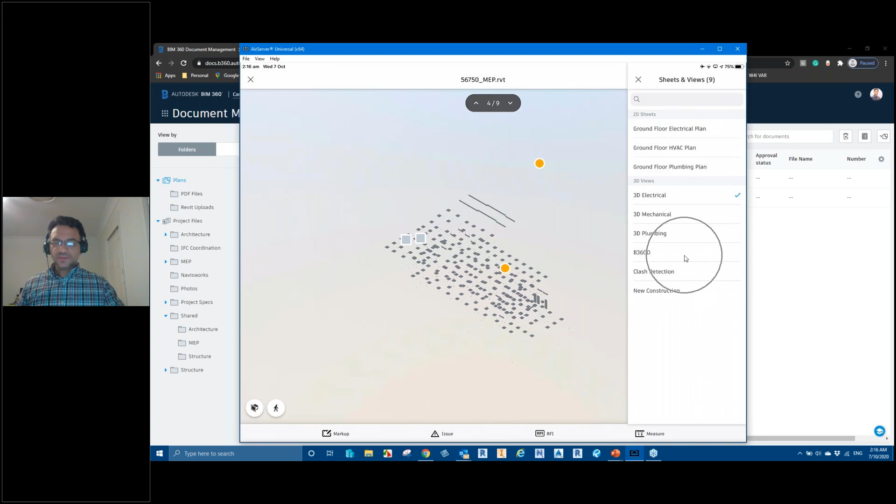It now gives me access to all the sheets that were published, as well as the views. For example, if I click on this B360D view, as soon as I tap on it, it opens this 3D view in a few seconds. This 3D view now gives me access to the full federated MEP model, along with the linked structure model.

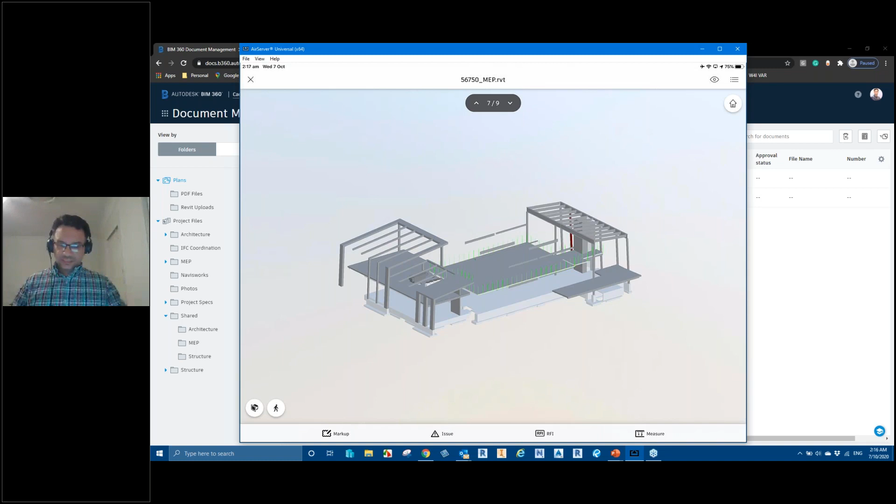In this view, I've not only got the mechanical, electrical, plumbing model, I've also got the linked structure model in here as well, just in case I'm on site doing some installation and making sure that things are working fine. Similarly, if I tap on the menu button on the top right again, if I go on the sheets and views...

I've got my 3D mechanical view, I've got my 3D plumbing view. I also have got a clash detection view here. This clash detection view was published to make sure that when you're running clashes, you're not including flexible ducts and things like that in clashes.

So in my case, let's say I'm a mechanical installer and I've gone on site to do some mechanical work. I can now tap on this 3D mechanical view. It now opens a view which only shows the mechanical discipline in it. It doesn't show the rest of the disciplines.

If I tap on this little eye icon on the top right, it shows me that there are issues and RFIs in this view. I can tap on any of these to turn them off. So this is how you can switch between different views and different sheets in this iPad app.

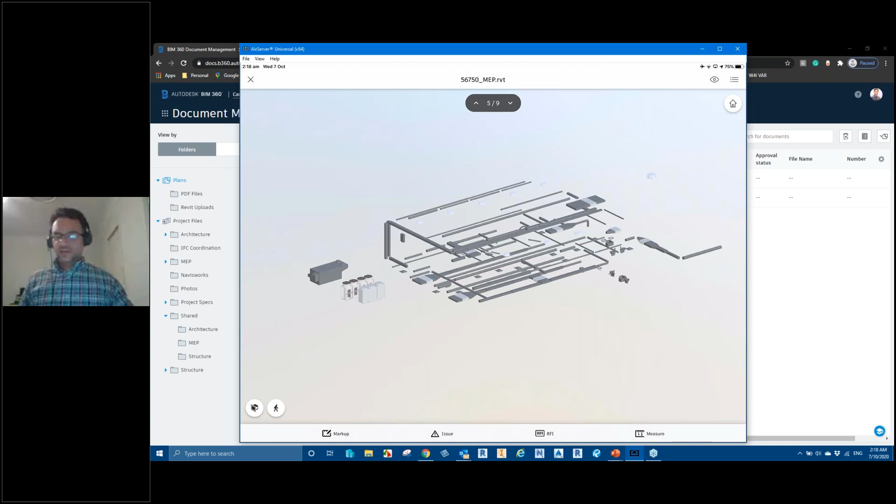Again, if I tap on the menu on the top right, I can also look at issues and RFIs and things like that right from here. But if I just quickly cross out of it and go back to the original page, this is my home page on my BIM 360 mobile app.

If you look at the bottom toolbar, I've got some options here, such as documents, issues, checklist, sync, daily logs, and RFIs. As I mentioned earlier, documents and issues are part of your basic BIM 360 document management service. So if you've got BIM 360 Docs or BIM 360 Design, you've got access to all of these. RFIs, daily logs, and checklist are all part of the BIM 360 Build subscription.

So RFI would be available if you have activated the project management service on your project, which is what I've done. I showed you earlier as well. Because I've got project management service active on this project, I can see RFIs.

When you are on site, you normally would start your day on this page here, and then depending on what you're trying to do, if you're on site to resolve some issues, you would simply tap on issues on the bottom toolbar, and it'll show you all the issues that you've got open. Depending on how and where the issue was created, it would also tell you the location of the issues and so on.

Similarly, if you are on site to do some installation and you want to access the documentation, you would simply tap on the documents option on the bottom toolbar. So if I tap on documents, here we go. As I said, if I go to the plans area, I've got access to the PDF files. If I tap on any of these PDF files, I can see all these PDF files here. Similarly, if I go back to the project files area, I've got the shared folder.

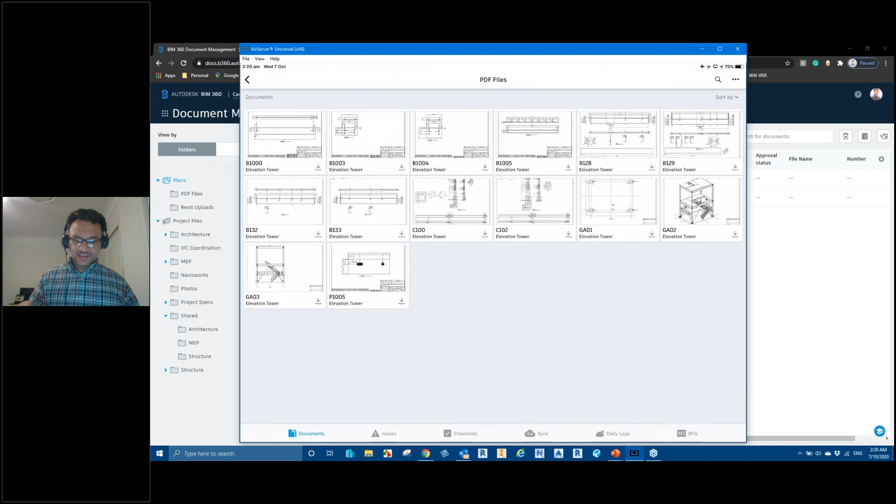So now that we understand the interface a bit, let's say in my case I'm on site doing some installation — let's say structural installation. If I go to the plans area and the PDF files, I've got all these different fabrication and installation documents here. So if I tap on any of these PDF files, note that I'm now in PDF files, and it opens the PDF file here.

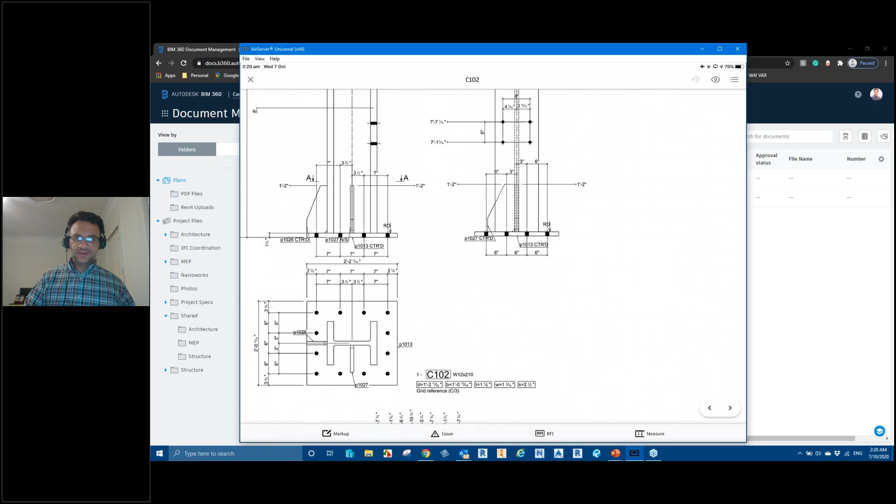Just like any other program, I can zoom in, zoom out, and look at the PDF file. To zoom in or zoom out, you simply pinch. If I pinch my fingers, it zooms out. If I spread the fingers, it zooms in. If I simply hold or tap one finger down and drag, that's panning.

So let's say I'm looking at this document here and there's some problem. Now I've got two options to work with that problem: I can either tap on markups and add markups, or I can tap on issues and add issues. Personally, I'm a big fan of issues because issues have got a proper issue management system running in the background, which means that when I create an issue, I can assign it to someone.

As soon as I assign the issue to someone, they get a notification straight away through an email that there's an issue for them to look at. They can then look at that issue, action the issue, change the status, and things like that.

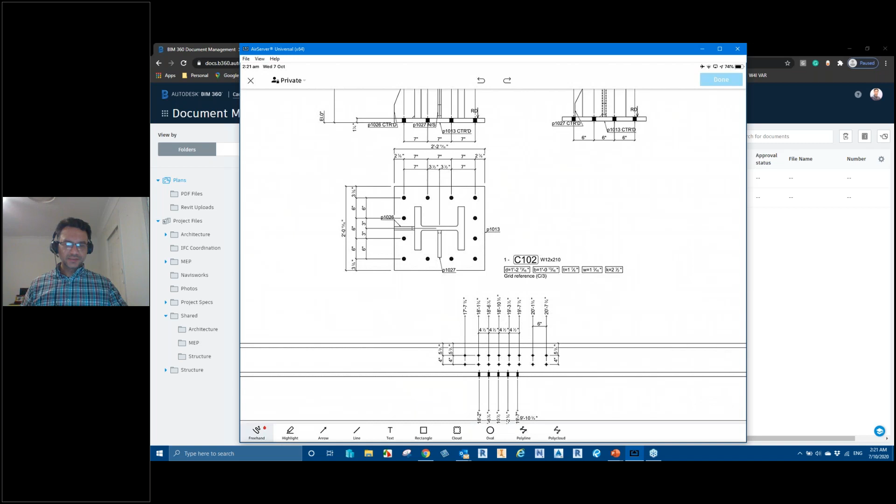But let me quickly start with markup first. So if I tap on markup on the bottom toolbar, now I'm in the markup environment. Now this is a PDF file, so when I'm in the markup environment, I can zoom in and out.

But please note that when you're working with 3D models, which I'll show you in a sec, in the markup environment you can't really zoom in and out of that view. You'll have to actually navigate to the location before you start adding markups.

Also on the top left here, I can see that currently this is going to be a private markup. If I tap on it, I can make it as a published markup. But I want to start with private markup.

I've got this freehand tool available by default. I can tap on any other tool, so let's, in my case, I'm going to tap on the cloud tool. And now I've got cloud tool active.

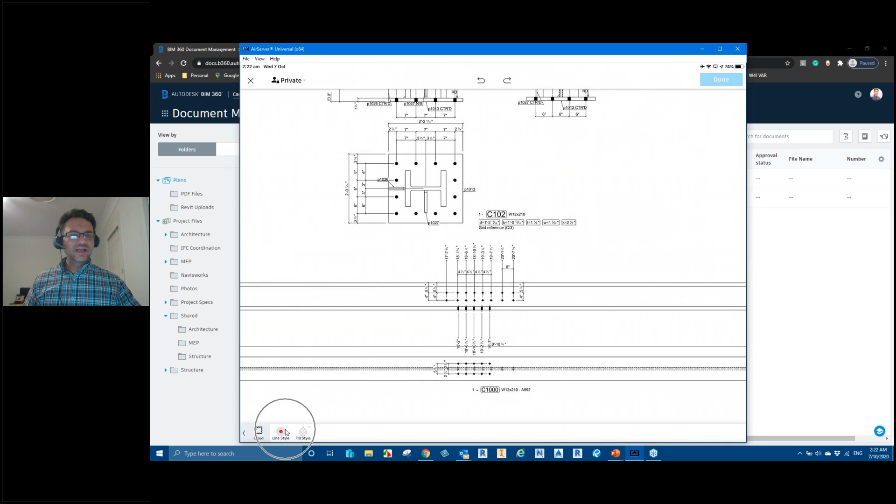I've got line style that I can change from here and fill style. So if I tap on line style, I can reduce the line thickness by tapping on the option here. I'm going to change it to blue color. And now I can drag two opposite corners to create a cloud.

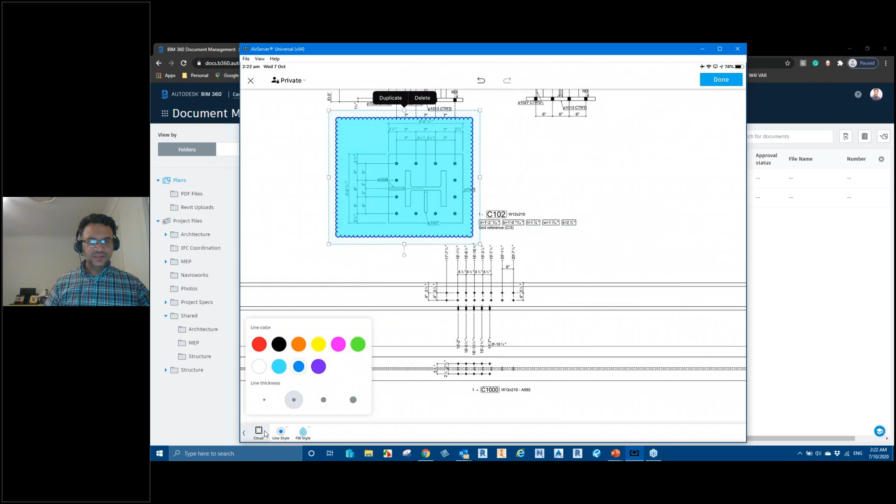I can also tap on fill style and I can fill this cloud with a color. Similarly, let's increase the line thickness to this. Yep, that's good. And now if I tap on this arrow to go back, I can now go and add a text.

So if I tap here and then tap on default text, I can now modify this text here. Let's say weld details missing, so we can get them to add weld details.

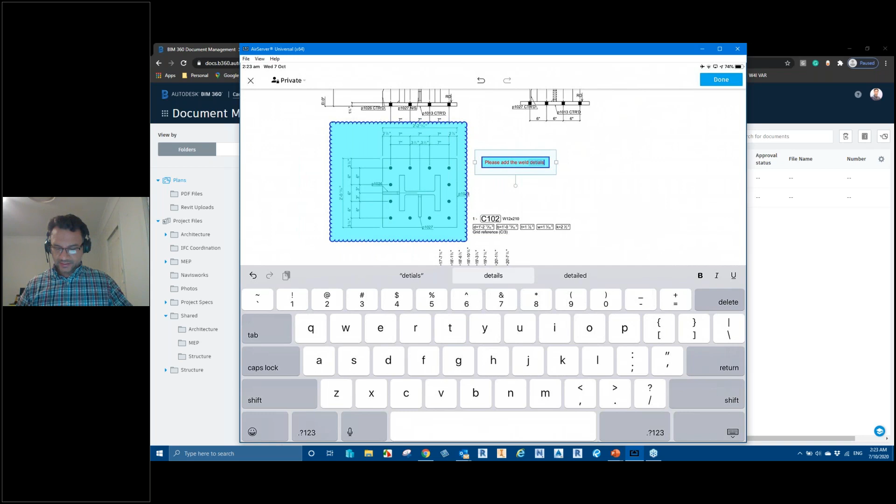And then if I want, I can also go and add an arrow or whatever it is. So let's say an arrow from here to here somewhere. As you could see, when I was adding this markup and this arrow, it remembered that I changed my color to blue, so it remembers those settings.

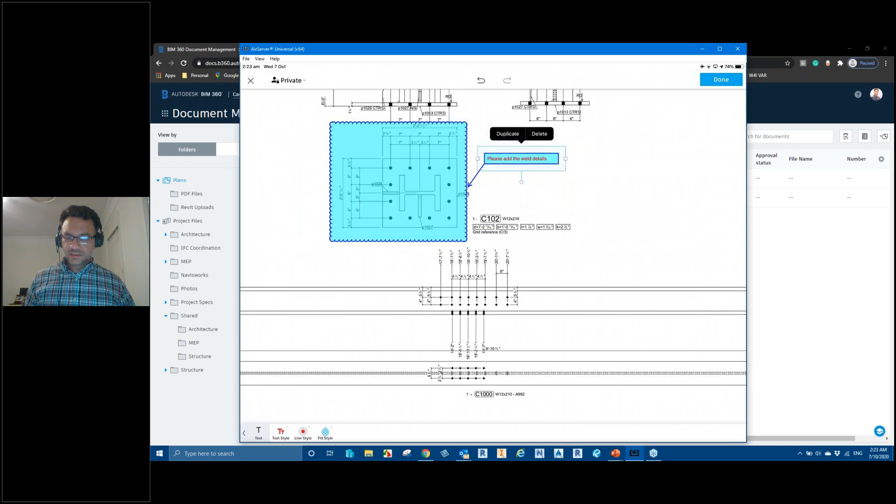Now, once I'm done adding the markup, I can tap done. As soon as I tap done in this PDF environment, I can see this markup here. Now, if I tap on the menu button on the top right again, it's telling me that I've got one markup here. If I tap on markup, it's telling me that that's the markup created by this user today. As you could see, it's telling me it's a private markup.

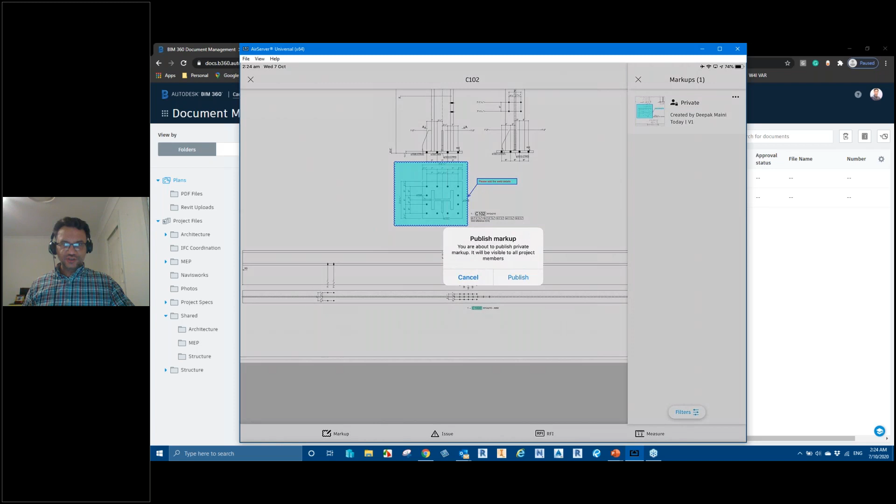At any point of time, I can tap on this and I can say publish. So right now, only I can see this markup. Nobody else can see this markup. But as soon as I tap on publish, that's when it says, are you sure you want to publish the markup? I'll say, yep, no worries. As soon as I say yes, publish markup, that's when all the members of my team who've got access to the PDF files in the plans area will be able to see these markups.

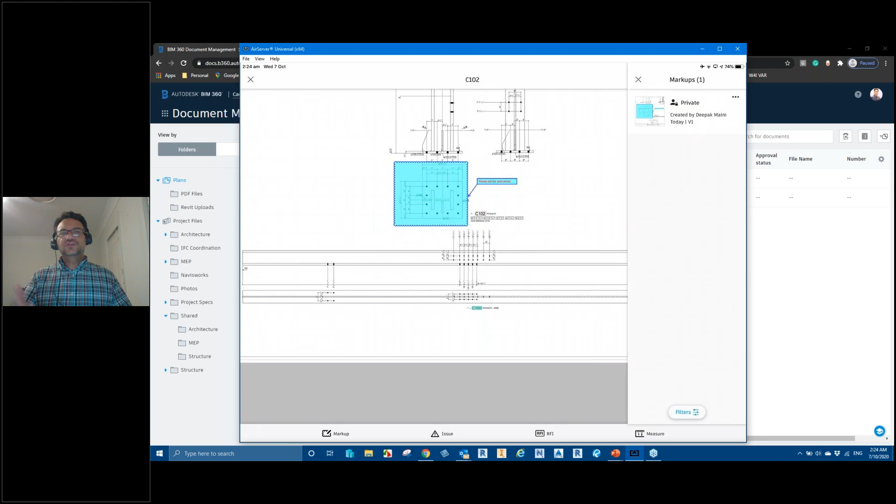However, I have not notified anybody about this. I have not told anyone that there's a problem for somebody to look at. It's like a markup—if somebody goes into this, yep, there's a markup there. So that's why I'm a fan of using issues and not markups that much.

So let's now have a look at creating issues. Let's say I'm the mechanical installer. I go on site and I have some installation issue. So if I go into my shared folder, I could go into the MEP folder here.

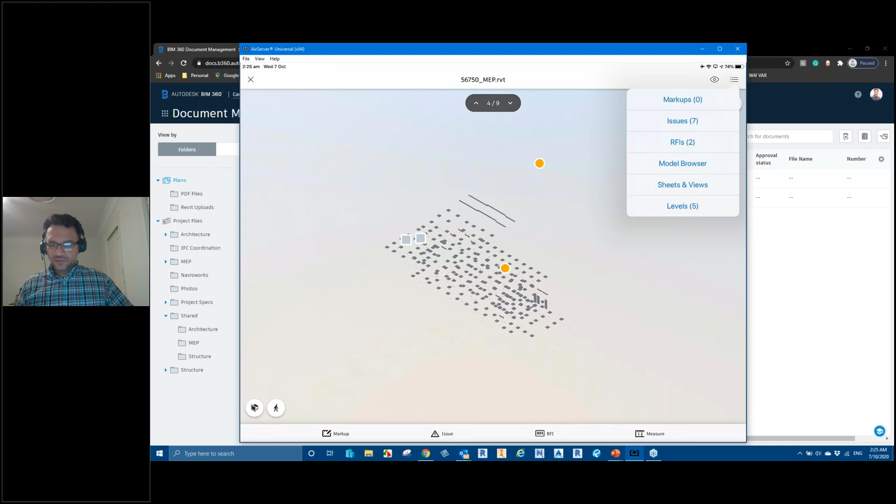I'll tap on MEP, I'll tap on this model. And just like what I showed you earlier, I'll tap on the menu on the top right, and I'm going to go into Sheets and Views. And I'll tap on 3D Mechanical. As soon as I do that, it now shows me the 3D Mechanical view.

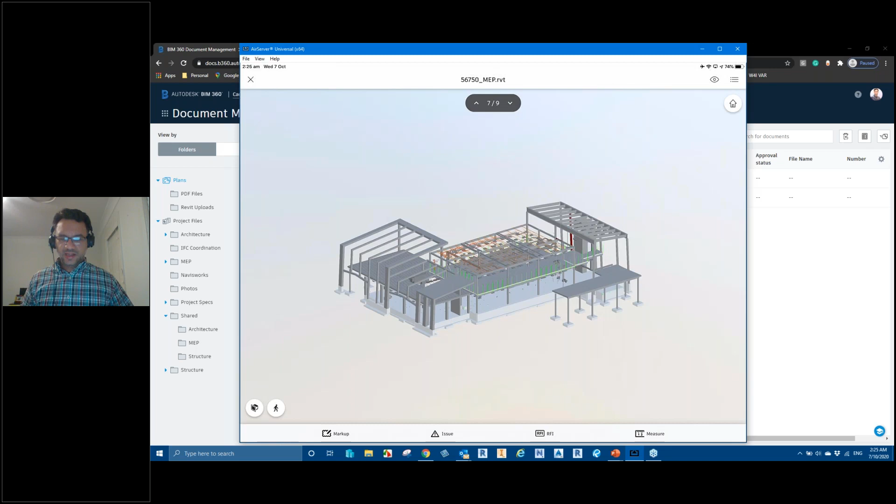Alternatively, I could just tap on this and I can go and say Sheets and Views. And if I tap on B360D, which is BIM 360 Design View, which I showed you earlier is a federated view, in this I've got the mechanical, electrical, plumbing disciplines, but I also have a structure discipline in there.

So let's say I find that there's a problem somewhere here for somebody to fix. I can simply go into that location, and now I can go and create an issue. If I go and add a markup, for example if I tap on markup option, in this case I'm in the markup environment now, but if I try to zoom in or out, I can't do anything. That's because in the 3D views, as I mentioned earlier, once you are in the markup environment, you can't navigate in that view.

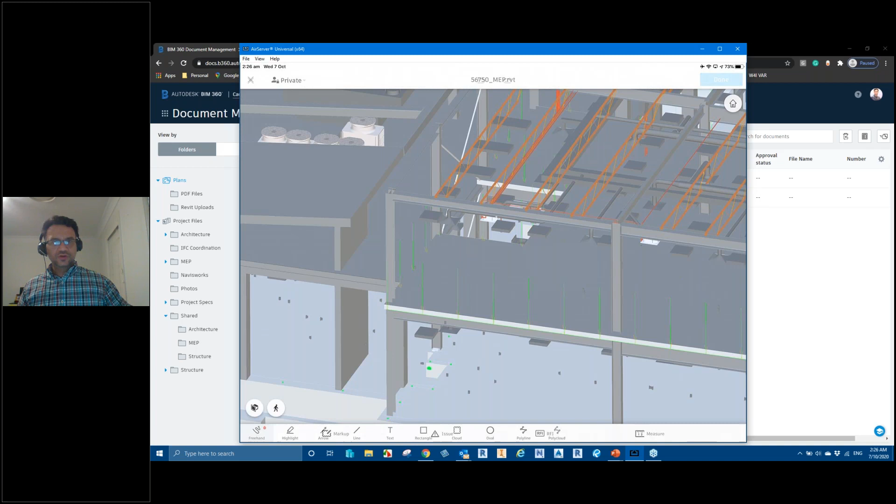So if you really want to navigate in the view, you'll have to exit out of the markup environment, go to the view where the problem is first, and then activate the markup environment. So if I tap on markup now, I can now go and add markups.

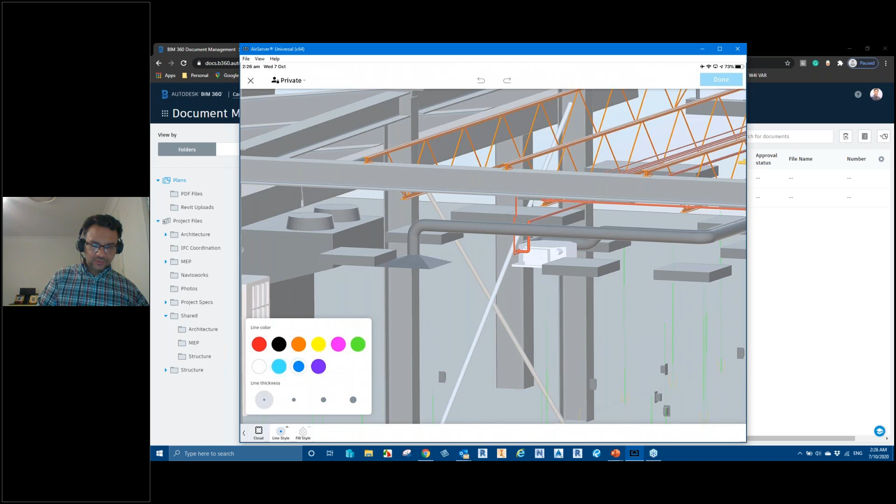Similar to the last time, if I go and say cloud, I'm going to use blue color for the cloud. Let's use this line weight, and I'm going to drag two corner points here, and I can also use the fill color. Pretty much the same concept that I showed you in the PDF file.

Now in the 3D environment, I have to tap on done. Once I tap on done, that's when I can see this markup. And now I can tap.

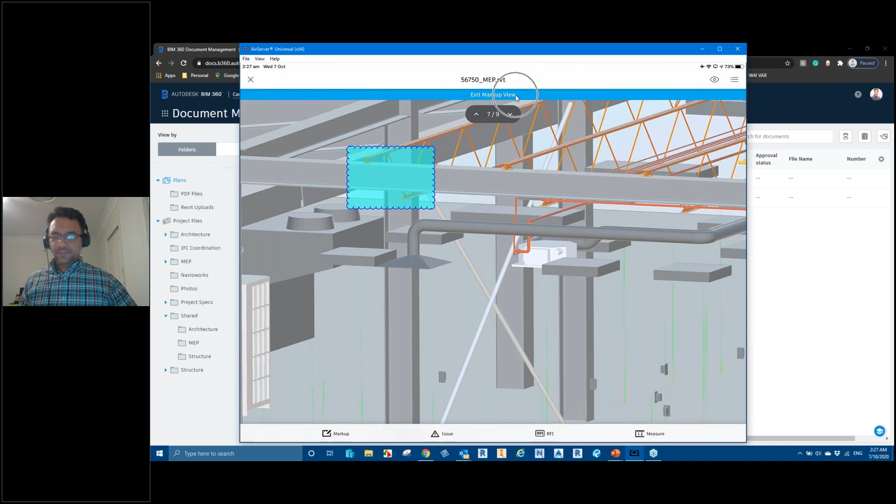So what I need to do is, although I am no more in that markup view within the markup environment, I'm still in the markup view. So I'll have to tap on this exit markup view to be able to go back. And to view that markup, I'll tap on the menu on the top right again, and I can say markups, and that's how I access the markup.

But as I mentioned, I'm not a big fan of that. I rather prefer creating issues. So if I go into this environment here, and there's a problem with, let's say, one of these vents, I can now tap on the issue option on the bottom toolbar.

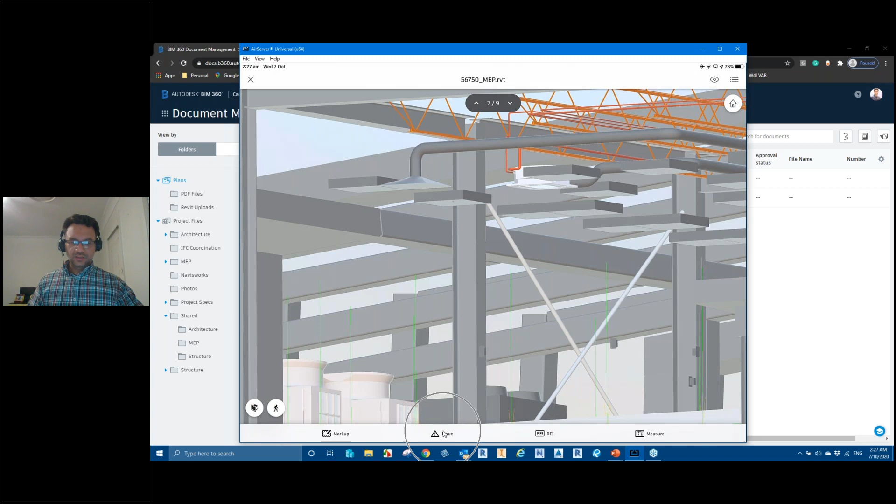Now, the first thing it'll do is it'll ask me to place the new issue pin. So I'll tap on this element here. As soon as I do that, it now places a pin there and takes me to this issue creation environment.

The type is set to design. If I tap on this design option here, I can say, no, that's not actually a design issue. It's a clash issue. It's clashing with something. I can tap on some details here.

So this element clashing with the steel. If I could spell it right, obviously, I could add some description here.

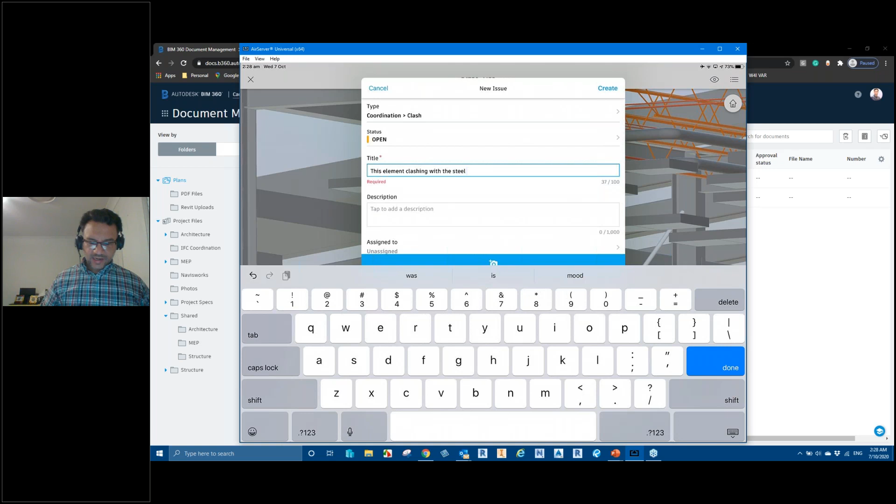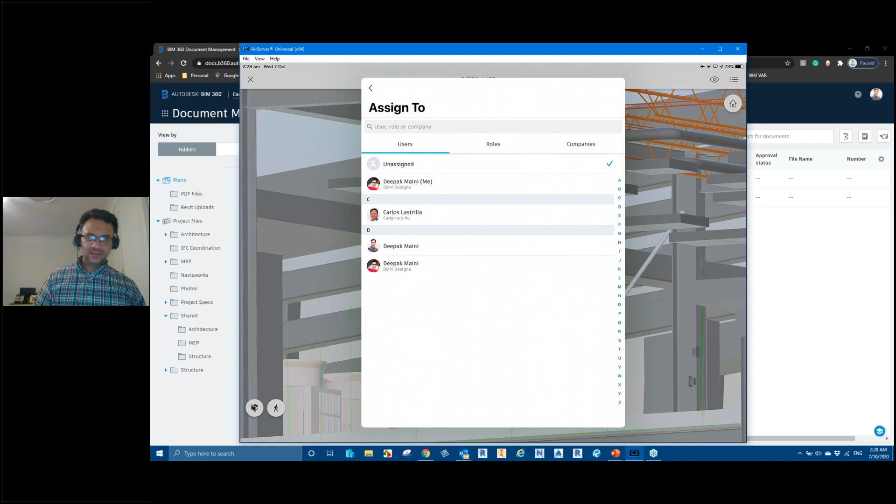But most importantly, I can now tap on assign to. So if I tap on assign to, it shows me the list of all the available members I could assign to. Obviously, I can assign it to myself. In my case, I'm going to assign it to Carlos. Carlos is based in Perth, so it's about 11:30 at night his time. So I'm going to tap on him and wake him up to action the issue.

Now I can also tap on location, and I can say this is in Tower 1 or Tower 2, so that's Tower 1. Please note that the location was visible because I've added location into this project. For due date, I'll tap on this and say, Carlos, you need to fix it by Saturday, and owner is me.

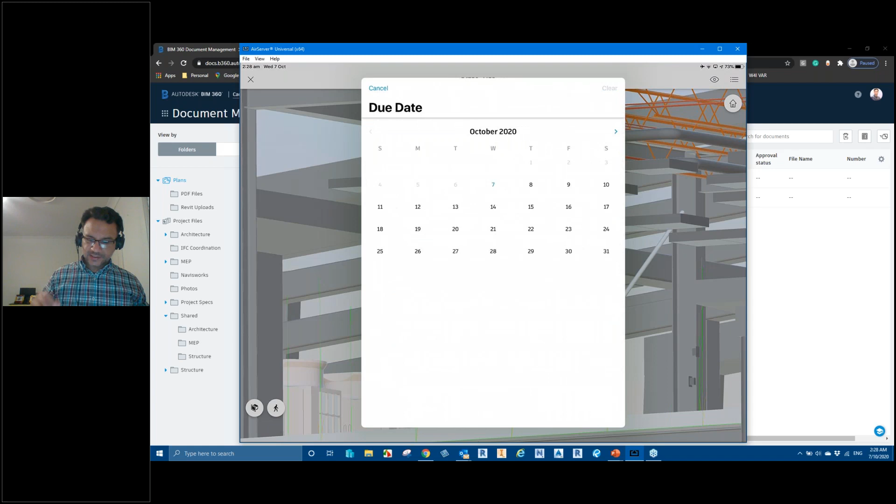Now, root cause, this is one of my favorite features. I would strongly recommend adding root causes to the issues, because as a project admin, I could start my day on my project homepage, which I'll soon show you.

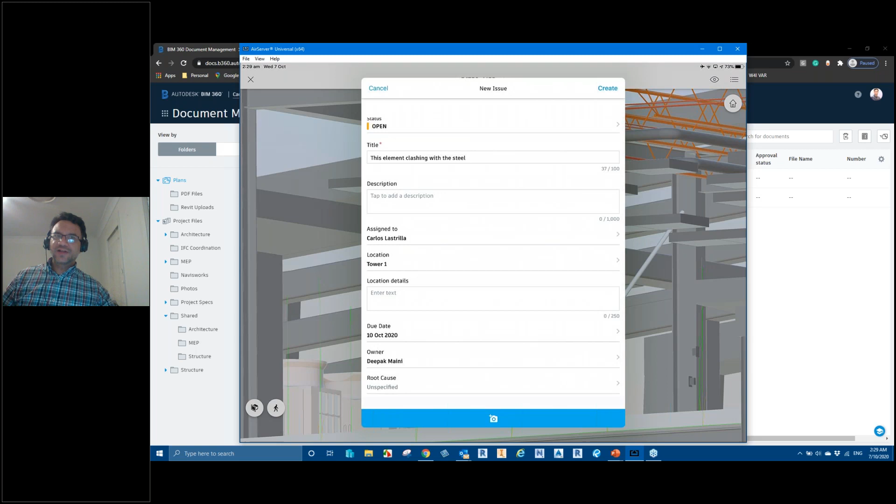And one of the cards that I could have on my dashboard is issues by root causes. So it gives me a single page, like a one-stop shop, to look at all the issues by root cause, so I can figure out what the problem is. Is it the coordination issues, or the clash issues, or some training issues, or whatever?

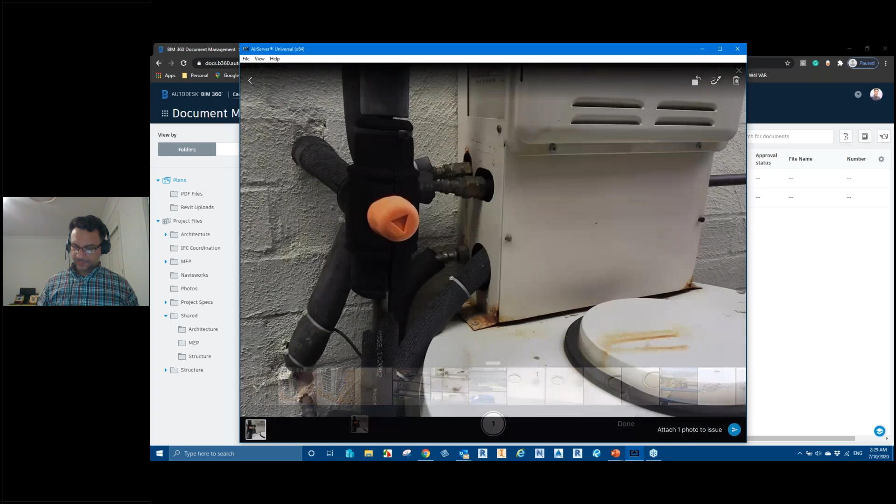So if I tap on root cause here, I could say this is a design coordination root cause. And if I want, I can also tap on this camera button and take a photograph. If I already have some photographs taken, I could just click on them and use that. So I'm going to say done, attached to the issue. With this, I'll tap on create.

So as soon as I tap on create, the user who was assigned this issue is straight away notified. If I tap on this issue here again, I can see the details of this issue, and I can see the attached photograph here as well.

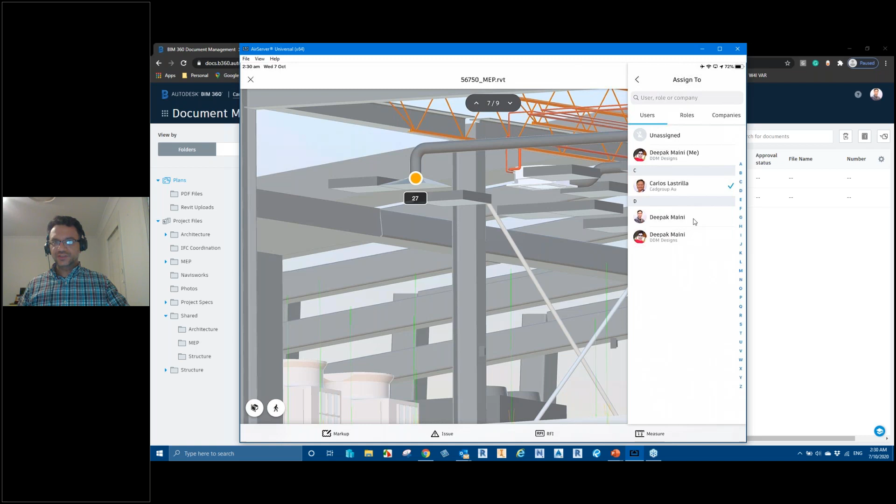So just for this discussion here, I'm going to change the assign to this user here, who's actually logged in as an admin on Chrome. So I'm going to assign it to this user here. As soon as I reassign this issue to this user, they now get an email about this issue.

So imagine if this user was sitting in the office, normally I would start my day on my BIM360 homepage.

If I do a quick refresh now, because I've added an issue, I would start my day on this BIM360 Insight homepage, which is like a one-stop shop to look at different issues in my project, different submittals, RFIs, and so on. One of the cards that I've added is issues by root causes. If I look at this card here, I can straight away see that there are all these different issues.

There are design coordination issues, code compliance issues, and so on. There are also 7 undefined issues, which should not be the case. You should always have issues assigned. And that's the email. Look at this. This user got an email straight away that there's an action, an issue that they need to action.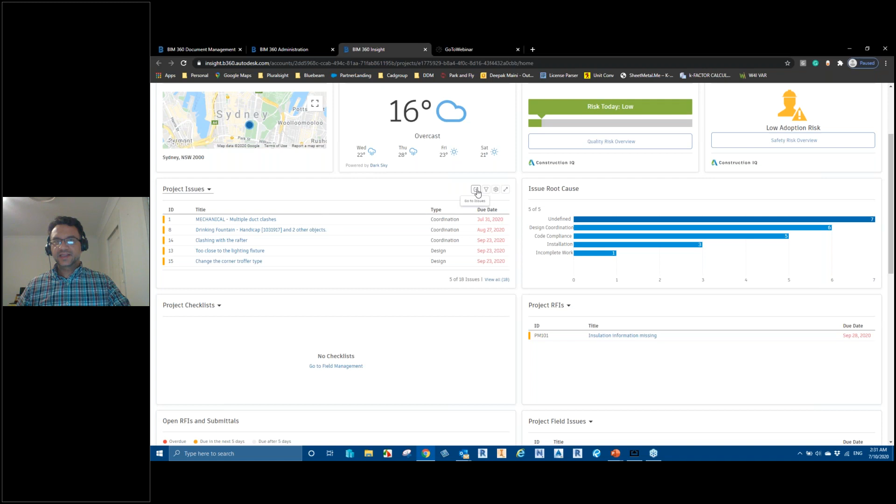So this user can now go into the project issues card here. They can look at the details, or if this user is in the document management window, they could simply go to the issues area and see all the issues assigned to this user. In my case, this is the issue that I just assigned to this user, and the due date is this here.

This is the really cool feature of the issue management system, where as soon as you assign an issue to a user, they get notification straight away, as you just saw in an email. They can now click on this issue and start actioning this. Once they have actioned the issue, they can then change the status of this issue.

So in this case, if I go and say status to answered, I could add an official answer: this is resolved in the next model, please review the model. And as soon as I go and say done, this is the best part of that shared folder.

So this issue was raised, there's a problem, and the design team gets together and says, yep, there's a problem, so we're gonna move this down or whatever it is. And then as soon as they make changes in the design files and they issue or publish or share their package, the user on site now has got all the latest documentation.

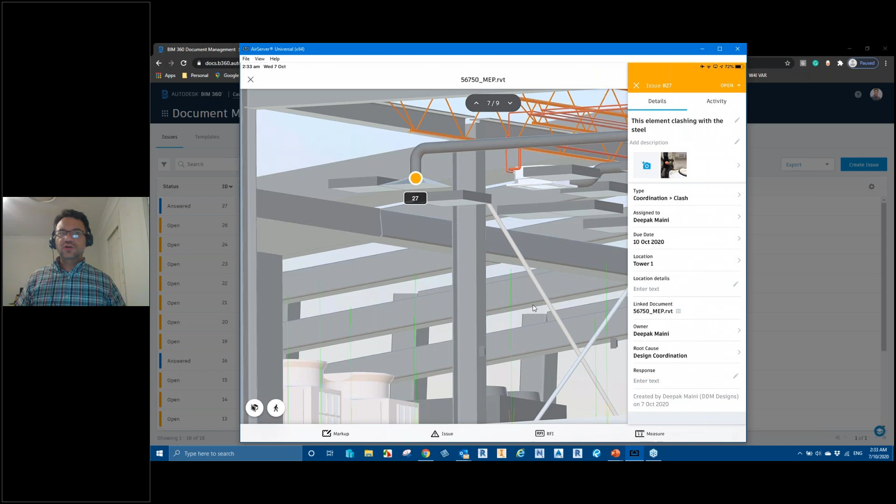So when this user goes back on site, or when they are looking at this model, as soon as they refresh this model, they would straight away see the changes. In my case, if I close out of this issue, tap on issues again, and refresh this area, I would straight away notice that the status of this issue is now changed to answered.

When I tap on this, I can see the activity area, I can see what the activity is. So I'm told that this issue is now resolved in the next model. And when I go into that model and tap on it, I can straight away see that yes, the clash is resolved because I've got access to the latest and greatest documentation.

This is where that $15 billion loss can be reduced by having access to all the latest and greatest documentation on site. And once I'm happy with this, because I created this issue, if I tap on the issue status on the top right, I can now change this to a closed issue. If I tap on closed, here we go - this issue is closed.

Now, the best part is by closing the issue, we are not losing any information about this issue. It still remains in our project, and we can then access the information about the project at a later stage as well. So we can filter the issues by resolved issues or closed issues or void issues and so on. And this information stays with the project in BIM 360.

So when I'm handing over this project to Michelle at the end of this project, she can get all this information as well if she wants. Alternatively, we can just clean up everything and hand over a pretty clean model or data set to her. So this is about markups and issue management system.

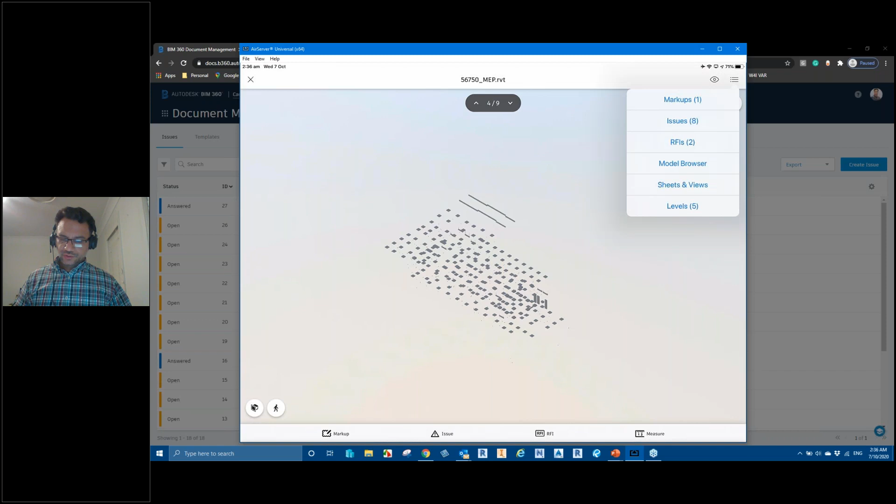So let's say I'm on site again. I'm a mechanical installer and I've gone to install some mechanical equipment. In the documentation that I've been provided, let me just turn off RFIs and issues. I'm going to go into the mechanical model again, and being a mechanical engineer myself, I love mechanical, so that's why I keep going to the mechanical model.

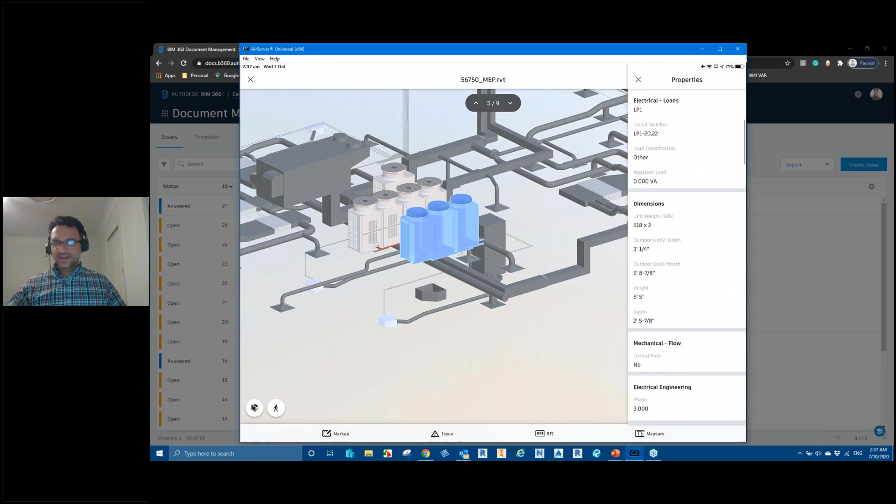All right, so I'm on site and I'm here to install, let's say, this piece of equipment. In the BIM 360 mobile app, I can simply tap on this equipment and go into properties, and I can look at the properties of this. These are all the properties I can look at straight away. Similarly, if I tap on it again, I could say section box. By creating a section box, I'm now looking at the section showing this equipment only, not the entire model. If I want, I can move the section box, resize it, and so on. Tapping on the section option on the bottom left, I can actually disable sectioning.

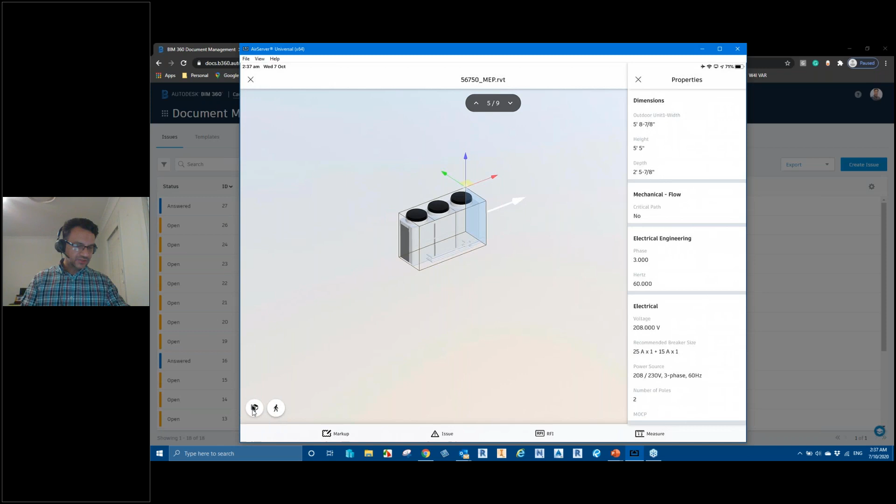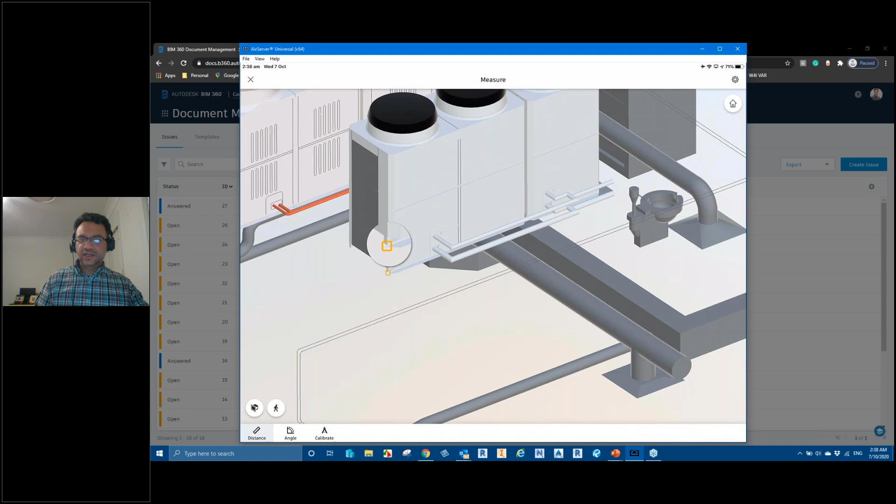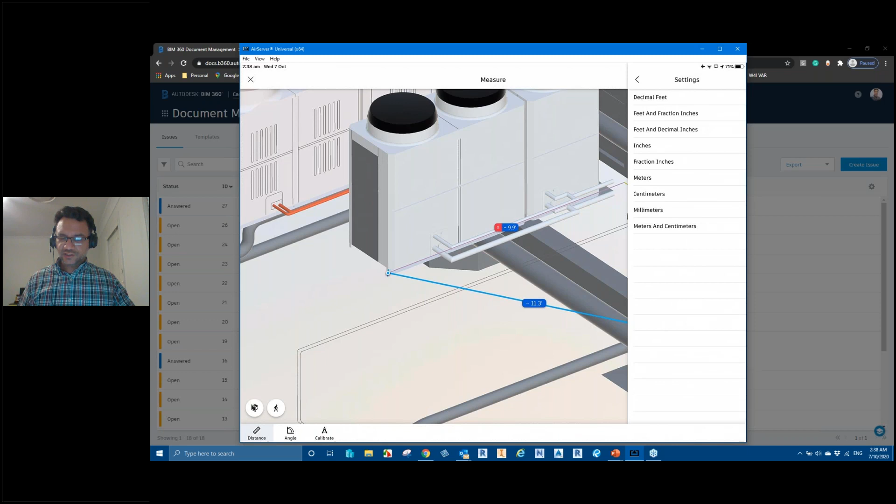Similarly, I can also use the measure tool. If I tap, let me cross out to properties. If I tap on the measure option on the bottom toolbar, it says tap 2 points to measure. So let's say I want to find out the distance between this corner point. If I tap and hold my finger down, it shows this little zoom area that allows me to select the right point, so I'll tap on this point here, and now I'm going to tap on this corner point. As soon as I do that, it not only shows me the distance value, it also shows me the X, Y, Z values as well. So it's telling me the Z offset is minus 9.9 feet. I'll say yep, that's fine, no worries. If I tap on settings on the top right, I could go and change my units, I could say feet and inches in fraction. So it's now telling me these are the values.

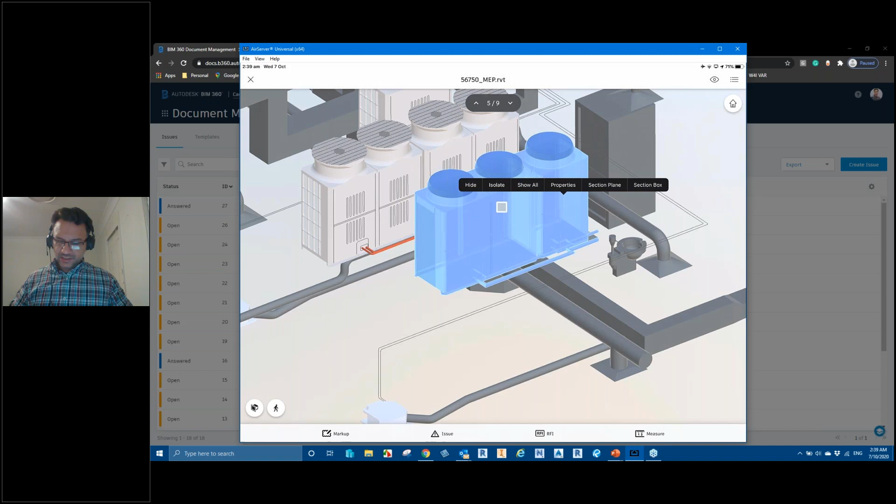This is okay, but let's say I do not have the right information about the servicing area that I need to leave around this. So if I exit out of the measure environment, I'll tap on this cross option, tap this element again and say show me the properties, but none of the properties here is showing me anything about the servicing area I need to leave around this element for installation. Let me turn off issues and RFIs. So what I could do in this case is go and create an RFI.

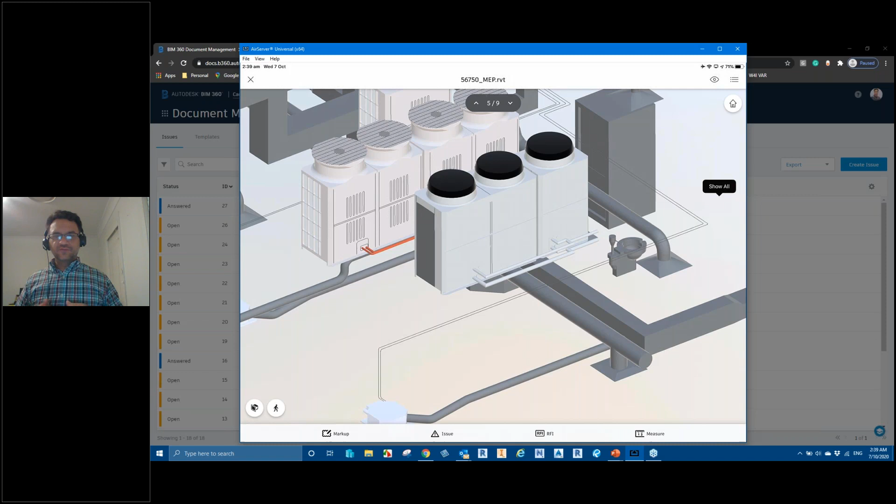Now, again, the really cool process is that once you create an RFI, the people involved in it would be notified. If I just quickly jump onto my BIM 360 administration page, because I want to talk about the RFI management process - if I go into the project management module, because that's the module that runs RFI, you have to first activate the RFI workflow. In my case, the RFI workflow that I've activated is everybody is given access to create an RFI. However, the way the RFI process works is, although everybody can create an RFI, it doesn't mean it's going to be a valid RFI. So if I click on this view extended workflow option, the way it's going to work is everybody can create an RFI, but it would be as a submitted RFI going to the manager first to look at.

The manager would then decide whether it is a valid RFI or not. If it's not a valid RFI, the manager can close this and say, yep, you've got all the information, don't need anything else.

Or the manager could say, you know what, it's actually a valid RFI. Then the manager would set the status of this to open, and that RFI would go into the reviewer who needs to review it.

When the reviewer answers the RFI, the answer first comes to the manager rather than going to the creator. The manager reviews it and sees, all right, there's all the information that was requested, and then the manager could say, yes, that's a closed RFI.

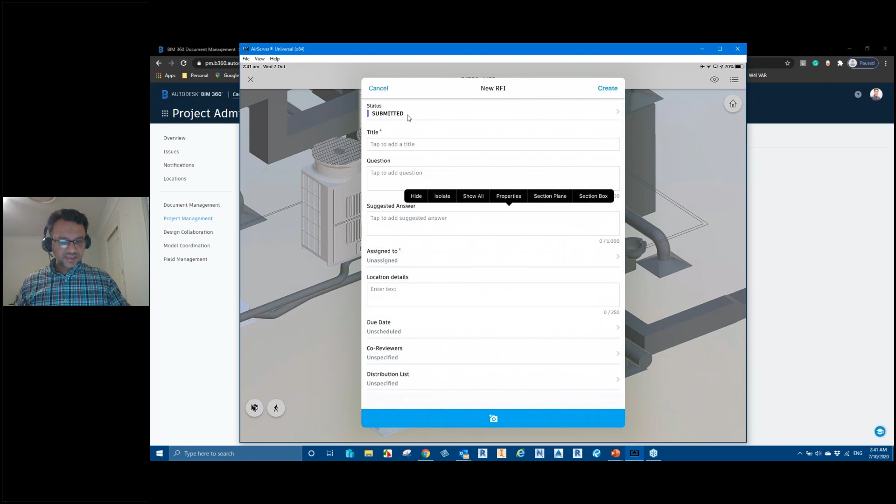As you could see, the status is submitted. Title, I'll tap on this title here, and I'll say missing servicing area info. Question to ask: how much area do I need to leave around it, or whatever it is.

Now, because I'm an experienced mechanical installer, I could also suggest an answer. So let's say we need 5 feet minimum all around.

And now I can assign it to—so if I tap on assign to, notice that the only user I can assign to is this one here. Because although all the users can create RFIs, they can't send it to everyone. It has to first be reviewed by the manager, and this user is the manager, so I'll tap on this user.

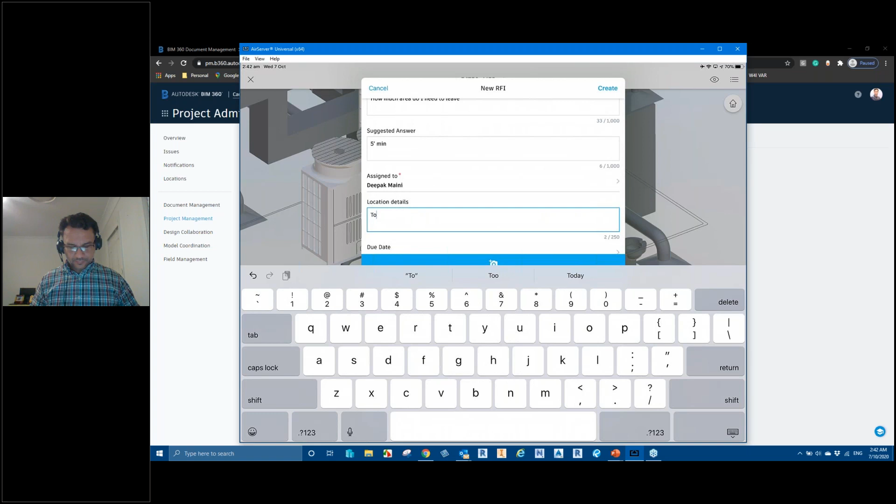I can add location details here. So if I go and tap on location details, I'll say tower 2, level 2, or whatever. Due date—because I'm on site, I don't want to waste my time, so I'll say I need an answer today if possible.

If I tap on co-reviewers here, I could also go and add a co-reviewer. Now it shows me all the other members of the project as well. Similarly, I could add a distribution list to others as well.

I'm also going to tap on this camera button to take the photograph. And in this case, I'm going to use an existing photograph. So that's the existing photograph that I have just taken. I'll say, yep, attached to the RFI. And now I'll tap on create.

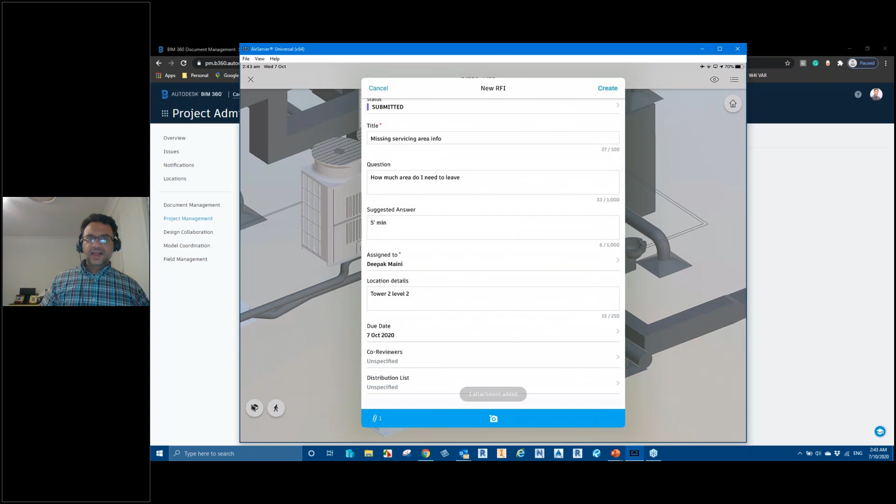As soon as I tap on create, now there's a new RFI created, and the manager gets a notification straight away that there's an RFI for them to look at. And the manager can now go, depending on whether they are in the field or in the office in front of their computer.

So if they are in the office in front of their computer, they could go into the document management interface, and then they can go into project management. This is where they'll see the submitted RFI. As soon as I go to this module, you would notice that it'll show all the RFIs that are available, but this is the RFI that was submitted.

So as soon as this user—as you could see, that's the RFI notification right here. I'll click on the submitted RFI, and I've got the information here. I can see what was asked. I can see, all right, there's an attachment here as well. There's an activity, all this stuff.

So if the manager thinks, yes, this is a valid RFI, we need the information too, the manager can then go and change the status of this to submit to reviewer, or they could say, you know what, no, this is not right, we've got all the information, so they can reject the RFI. But in this case, they're going to go and say submit to reviewer.

Now, as soon as they click on submit to reviewer, you can add co-reviewers like last time, distribution list, or whatever it is.

But most importantly, you can define an RFI number here. In my case, it automatically picks the RFI number because that's the scheme that I'm using. I'll click submit. Now, as soon as I click submit, the status of this RFI is changed from submitted to open, and the reviewer gets the notification.

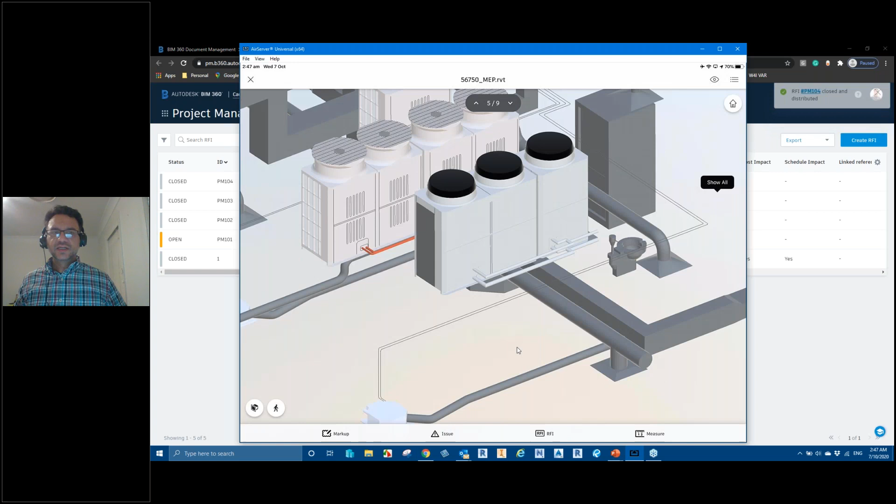So once I close this RFI, the field executives would get an email notification straight away if they are in their email environment. Alternatively, if they are not in their email environment, they're waiting for the answer. Now, when they tap on the RFIs option down the bottom here, I'll simply drag this down to refresh.

So now, I don't know why it's showing failed to sync RFI. Let's actually retry. Yep, there we go.

So now maybe there's an internet issue on the iPad, but I can straight away see that the RFI status is set to closed, and I can tap on activity, and this is where it's showing me all the activities here. But most importantly, I can see that there's an attached PDF file. So on site, on my mobile app, I can tap on this PDF file to open it and have a look at all the details that I was after. And if the PDF file has got all the details, I can now continue with my installation.

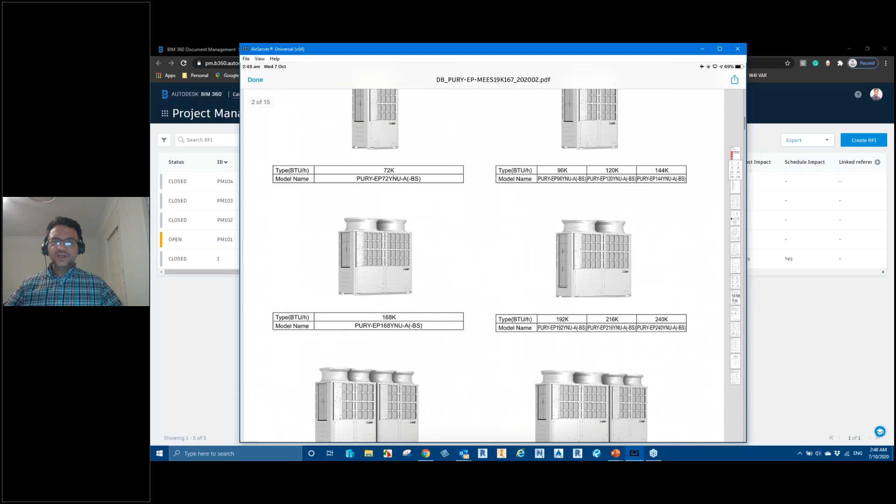So again, the whole idea is having all the latest and greatest information on site as soon as the answer is provided. So I've got all the installation details here, and I can now use this information to continue with my installation.

How cool is that? Hey, Deepak. So, yep, can you just talk about, like, can you use these if you don't have an internet connection on the site? Brilliant question, yes, I was about to mention that.

So the really cool thing about BIM360 mobile app is a lot of this, or most of this workflow, can be used on site even when there's no internet, including the documentation. So all the folders would have this little down arrow here. So if I go into the shared folder also, you could see that all these folders have got the down arrows. Similarly, if I go into the PDF files area or PDF files folder, I can see this down arrow. What this does is it lets me download these documents on my device, which means that if I'm going on site and if there's no internet, I can still continue working with this. So BIM360 mobile app allows access to all these features in the offline mode as well.

Same thing with issues. I could go and create issues in the offline mode. And if there's no internet, it is still sitting on my machine. As soon as I'm back in the connectivity range, that's when it does automatic sync. So BIM360 mobile app does not need manual syncing. It is always syncing if there's an internet connection.

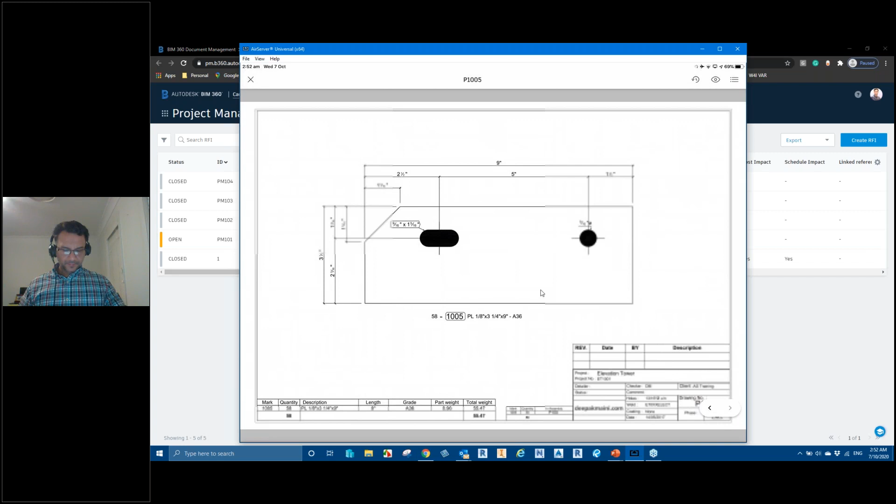So if I go into issues here, let's go into a PDF file. Let me bring up my iPad. If I tap on issues here, and tap on this, the template that I've got available is pretty much what I see here - it doesn't give me access to all the other template details that we've got.

So if I go into my information here, all the details that we've got based on issue templates - that kind of information, or not all of that information, is available. But let me quickly go and create a new template, and let's say I want to create a new category, let's call it site issues.

Issue title could be site issues - create. And if I go and say the title would be site location issues. Because these are site issues, I'm going to say these are requirement changes. Initial status is always open, and this is going to be assigned to, let's say, this user. Due date, let's say, is always going to be 5 calendar days. Location, I'll leave it there. So if I go and create this template, now that's a site issue template created.

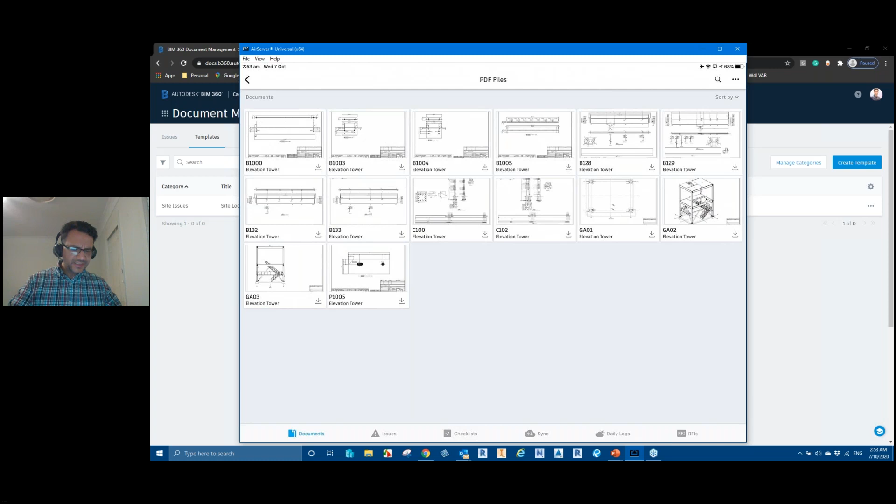If I go into my BIM360 mobile app, let me just cancel out of this, and let's do a quick refresh. So if I go into PDF files again, and tap on, let's say, this file, and then tap on issues, let's say I want to create the issue somewhere here.

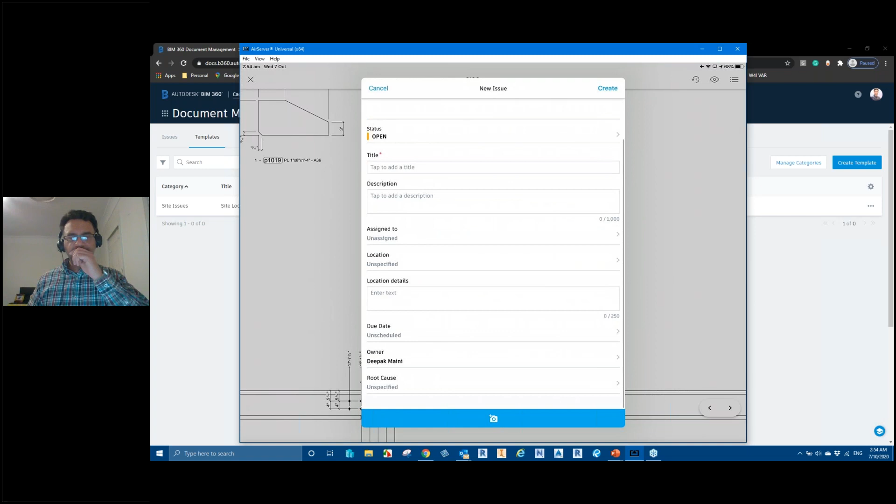Now, again, if I tap on type, I've got this information here, but not really the template information we were looking for earlier. So the answer is we've got some information available on the iPad app, but not all the template information. I think it's one of those wish list items as well.

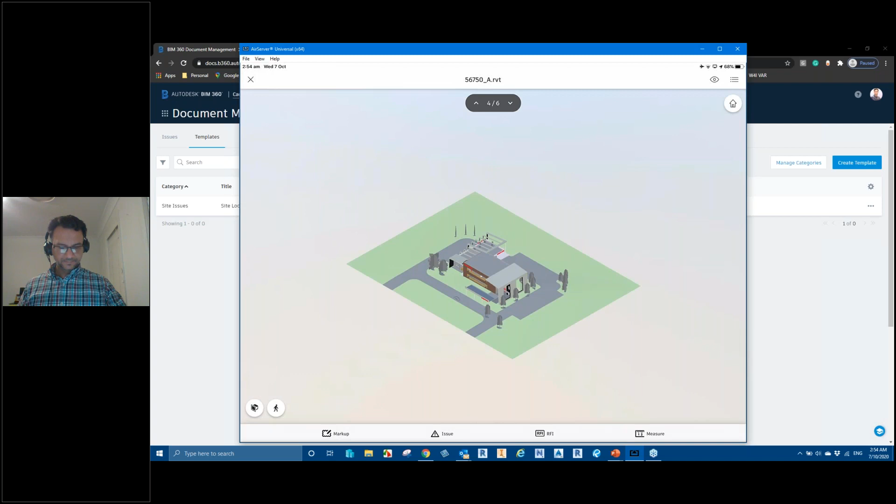Okay, great. And we have a question: are there reconciliation issues, and how does it resolve when there are issues? So what kind of reconciliation issues are we talking about? That is a good question. Let me try opening up the line. Let's see.

Maybe you can talk about versions and markups, how the markups are related, maybe. So every time you look at the file, it would always tell you the version number that you're working on. So if I, let me just cancel out of it.

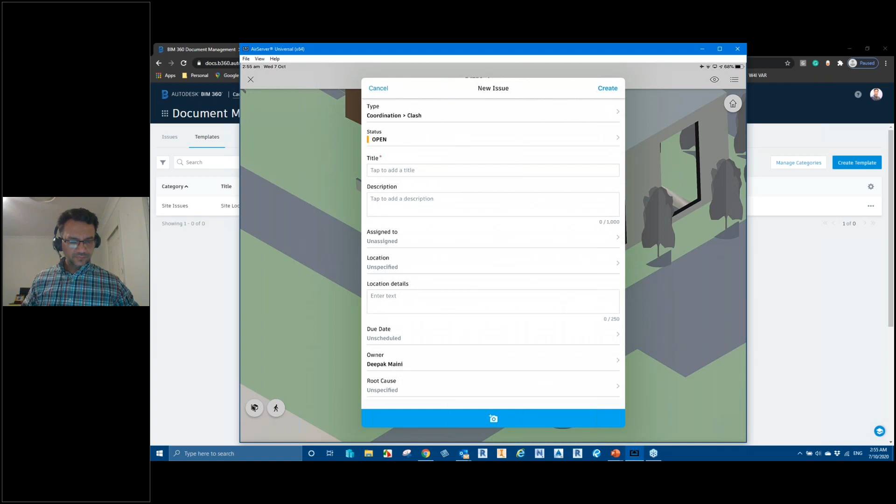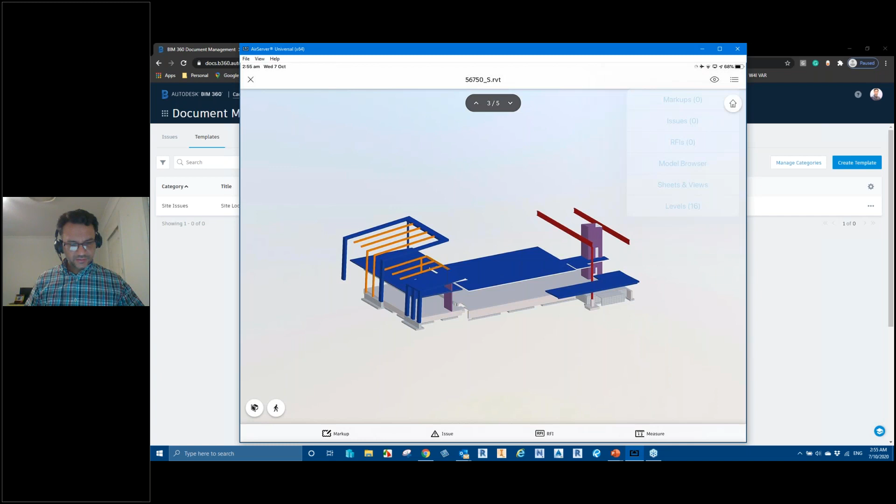Whenever I go into a folder or a file, I can always look at different versions of this file and tap on it to see all the details. But the good thing about issues or markups is when you tap on any issue or markup in a file, it tells you what version the markup was created on. So if I tap on this here, you can see this was created on version 3. So that information is available with the model for sure.

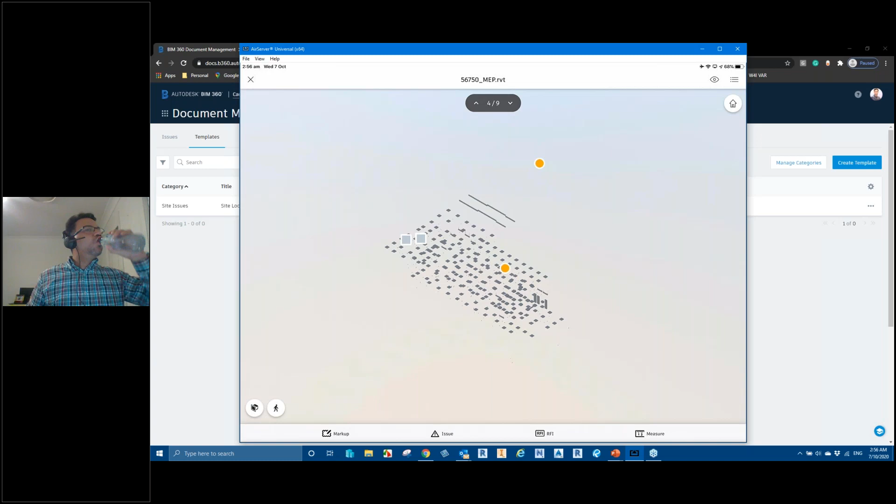Let me try opening up. The question came from, and I apologize if I say your name wrong, Svetlana Katova. Can you talk to us? I've tried opening your line, I've seen you in here twice, so I've opened up both of them. Let's see if you can talk. I don't think we can hear you, Svetlana. Maybe they're not hearing us.

Hopefully that answered the question since they're unable to talk to us. Let's go to the next one.

Vivek asked: can we change the workflow after an RFI is issued? After an RFI is issued, I don't think we can change the workflow, but I can have a look at it, because once the RFI is initiated, managers can reassign it or change the roles in the RFI management system. So if it goes from manager to reviewer, they can add additional reviewers as well. But I don't think they can change the workflow after an RFI is created. Michelle will make a note of it and we'll get back to Vivek about that.

Thomas asked: can you use the BIM360 mobile app to create markups, issues, RFIs, etc. as a subcontractor if the general contractor allows us to create them without owning BIM360? So I think that's a licensing thing, right? That's a brilliant question, yes, I'm glad somebody asked that.